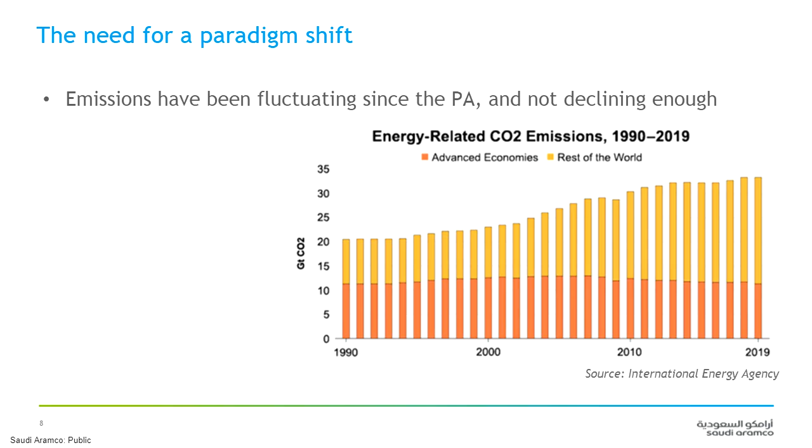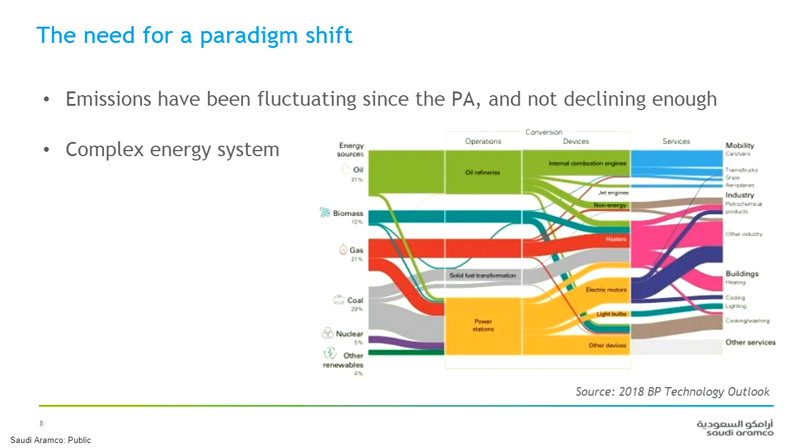Solving this dual challenge will require a paradigm shift in the way we address both energy and climate issues. And there are several elements that support this need for a new paradigm. I will just name a few. First, emissions have been fluctuating since 2015, despite an international agreement set to limit the increase in the global average temperature to well below 2 degrees Celsius above pre-industrial levels, the so-called Paris Agreement. Second, the global energy system is complex with interdependencies and energy products traded across the globe. There is a big difference between the real energy system and the theoretical ones as we design them in our offices and laboratories. In the refining industry, for instance, we have to balance geographical shortage on gasoline and diesel.

Third, the scale of climate challenge is huge. The World Bank estimates at $90 trillion the need for climate-resilient infrastructure investment by 2030. For example, the needed carbon capture and storage capacity alone to deliver on the Paris Agreement ambitions is at the scale of today's oil and gas industry in terms of volume. That is very massive. Very significant investment in renewable energy and energy efficiency in the range of several trillions of US dollars are also needed.

Many key economic sectors are constrained and hard to decarbonize. This includes power, industry, and transport. Indeed, dispatchable power requires storage, which is not available today and will be challenging to implement at grid scale. In the industry, cement, steel, and chemicals are all constrained, while their products will be essential to support economic growth. In a few vital cases, the CO2 is not linked to the combustion of a fossil fuel, but from the process itself. A good example is cement industry, where more than 50% of the CO2 emissions are from the decomposition of calcium carbonate to calcium oxide. Heavy-duty transport, aviation, shipping are all struggling because of lack of technological solutions, although offsetting options are being considered in these sectors. However, there is a hope with hydrogen in industry and transport, but economics and policy have to be improved for mass adoption.

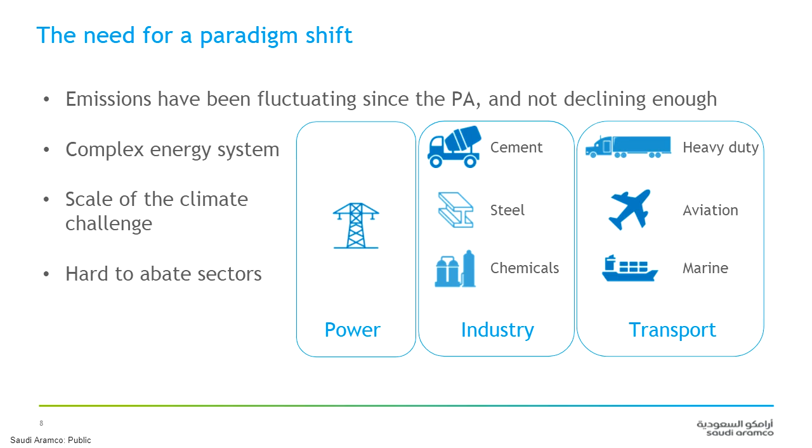Hydrocarbons continue and will continue to play a significant role in the global energy mix for decades to come. Substitution of fossil fuel will require time, money, and technologies that are often not available or economical today, limiting deployment opportunities. Examples include energy storage, CCS, and hydrogen. Most of current climate policies focus on reducing fossil fuel demand only, undermining the potential of carbon recycling and removals. These are the gaps that the circular carbon economy approach is trying to address.

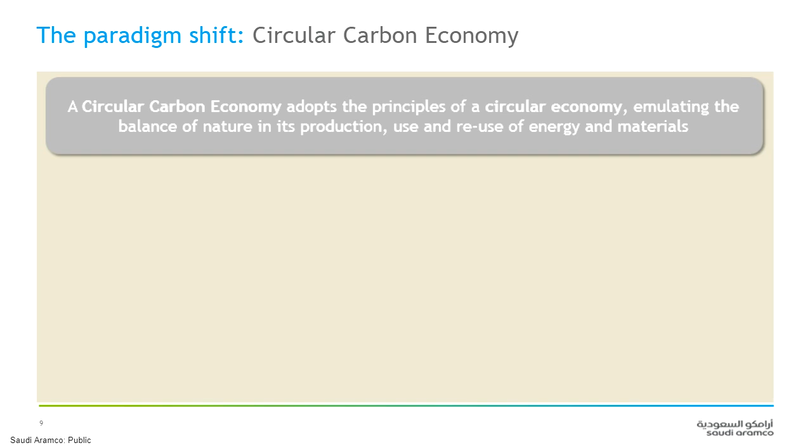At Saudi Aramco, we believe the circular carbon economy can be the solution for the dual challenge of providing clean and affordable energy to the growing world population while addressing GHG emissions. A circular carbon economy adopts the principle of a circular economy, emulating the balance of nature in its production, use, and reuse of energy and materials. I will explain now how a circular carbon economy is different to the well-known circular economy.

As we all know, a circular economy is a system designed to minimize resource consumption and waste disposal, mostly implemented in the waste management industry in the 70s. The focus is on resources and material flows, and the system is based on three principles: reduce, reuse, and recycle, the three R's. A circular carbon economy is an all-inclusive approach that values all options and encourages all efforts to mitigate carbon accumulation in the atmosphere. It focuses on energy and carbon flows.

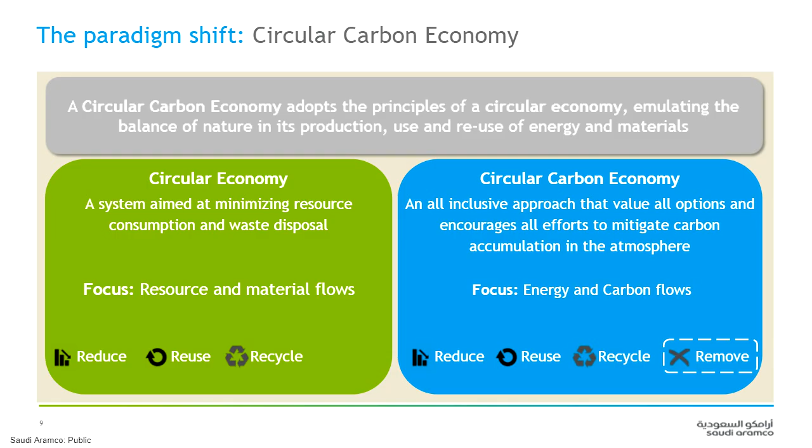A circular carbon economy adds a fourth R, remove, to the 3 R's of the circular economy, making it 4 R's: reduce, reuse, recycle, and remove. Given the global economy's reliance on hydrocarbons with decades of investment in energy infrastructure, we believe the circular carbon economy offers a holistic and pragmatic approach for managing greenhouse gas emissions in a closed loop involving the 4 R's. In the next slide, I will define each of the R's and provide examples of technology solutions under each of the R's.

Reduce under a circular carbon economy framework involves all options that reduce the amount of CO2 entering the atmosphere. Examples of mitigation options under reduce include energy efficiency, non-biomass renewables, nuclear power, CO2 capture from stationary sources such as industrial facilities or mobile sources such as ships, heavy-duty trucks, and fuel switching from coal to gas in the power sector, for instance, and hydrogen.

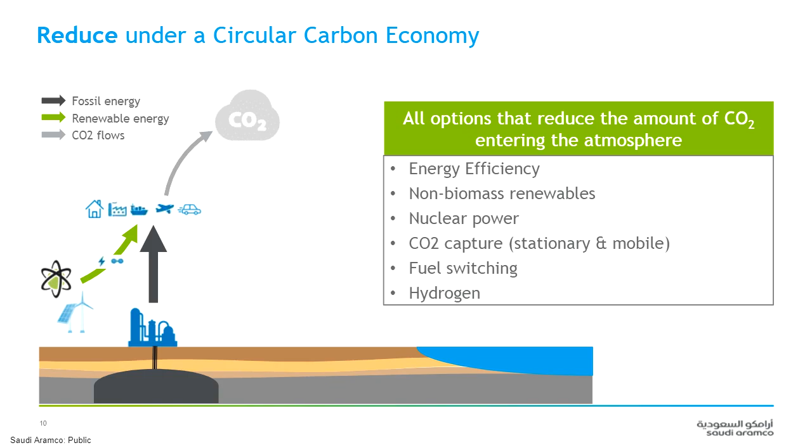Reuse under the circular carbon economy framework involves using CO2 without changing its molecular form. CO2 is not chemically reacted. Examples include most of today's use of CO2, such as dry ice, blanketing, fire extinguishers, etc. So this represents around a few hundred million tons of CO2 per year. Supercritical CO2 applications, such as in the power sector, where CO2 can be used as working fluid instead of steam, as in conventional steam cycles. The US-based company Net Power is piloting this technology in Texas.

CO2 enhanced oil recovery, where CO2 is injected in maturing oil fields to improve the extraction of the remaining oil. In this process, part of the injected CO2 remains permanently trapped underground.

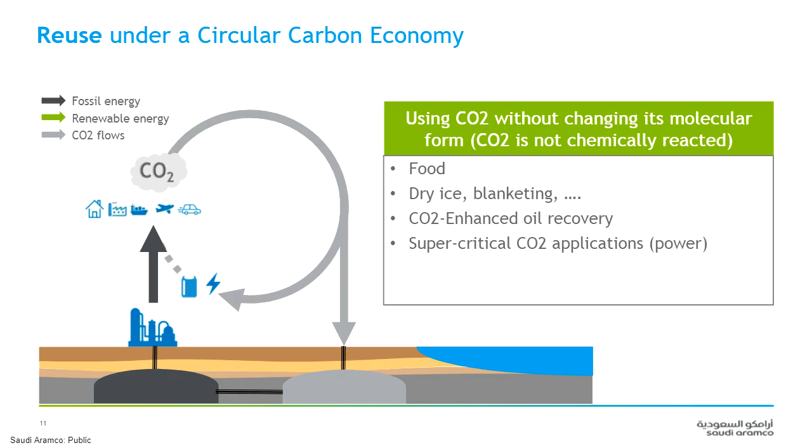Recycle under the circular carbon economy involves turning CO2 into new products. The CO2 is chemically reacted in this step. Examples under recycle include synthetic fuels, fertilizer and urea, methanol and chemicals production, polymers and concrete. In most of these cases, cheap renewable energy is needed for the chemical reaction to provide a real climate benefit based on a comprehensive life cycle assessment.

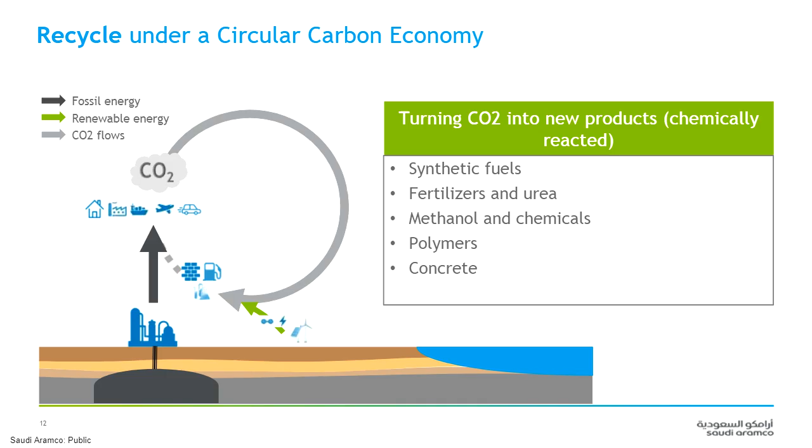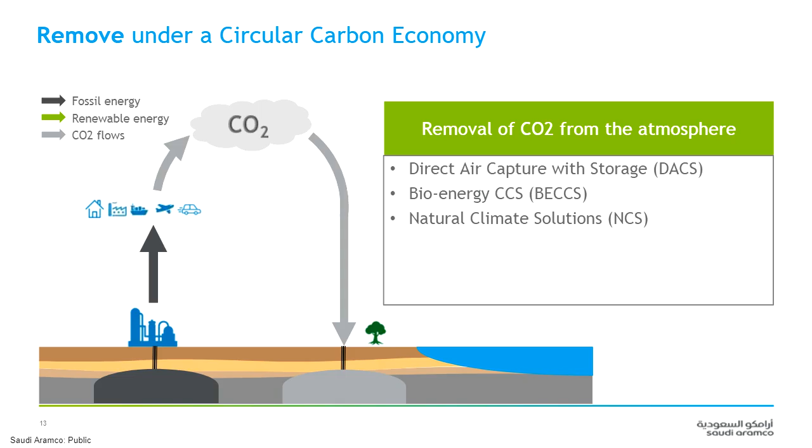Remove under a circular carbon economy involves taking CO2 out of the atmosphere. Examples include direct air carbon capture with storage, DACS, bioenergy with CCS, BECCS, and natural climate solutions, NCS, such as reforestation, soil, and oceans. All combined together, this is how a circular carbon economy framework may look with the 4 R's: reducing, reusing, recycling, and removing greenhouse gas emissions in a closed loop.

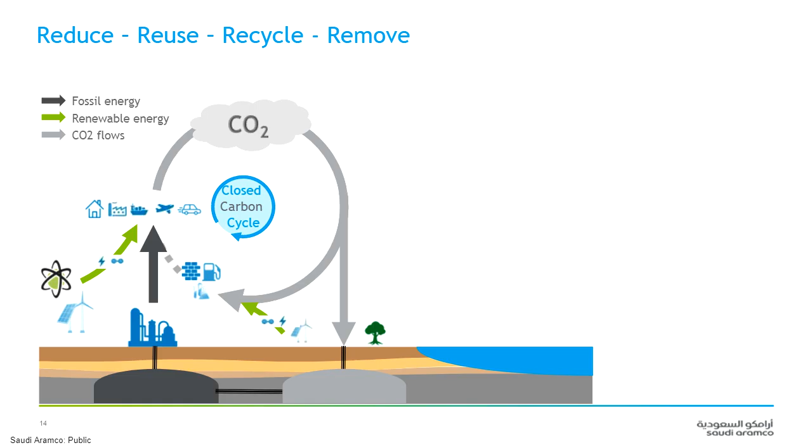We believe this framework offers a holistic and pragmatic approach that integrates all energy sources and values all emissions mitigation efforts, allows the optimal use of existing energy infrastructure and values decade-long investment in the energy system, addresses emissions in hard-to-abate sectors by building a carbon reuse and recycling economy, and enables negative emission technologies that are crucial for meeting the net zero emission target.

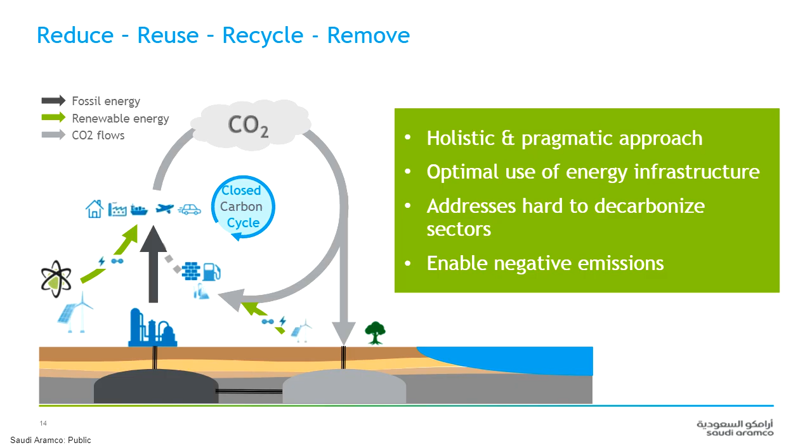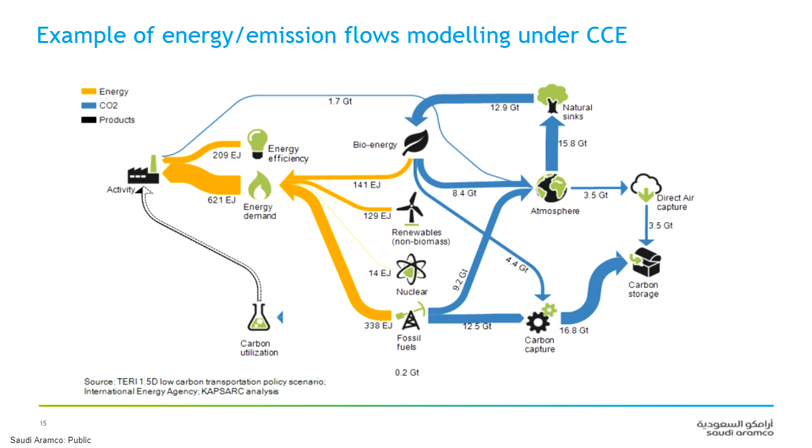The circular carbon economy is a G20 priority for this year in both climate and energy working groups, with an objective to build consensus around needed policies, technology innovation, and collaborations. I have the privilege to be part of those meetings, and there is certainly a growing interest from G20 members on the circular carbon economy approach.

Japan already established a circular carbon recycling initiative under their Ministry of Economy, Trade and Industry (METI). They focus on the production of CO2-free hydrogen and zero carbon electricity supply as enablers for chemicals, fuels, and mineral production. The U.S. Department of Energy held a summit in 2018 on realizing the circular carbon economy. Discussion focused on how to integrate nature-based solutions, renewables, and carbon capture in a view to balance emissions between source and sinks.

In 2018, the Oil and Gas Climate Initiative introduced the Net Zero Pathway under the title Towards Circular Carbon, focused on improving energy efficiency, providing clean and affordable energy, capturing, storing, and using CO2, and balancing remaining emissions through the NCS. Many other countries and institutions are adopting the circular carbon economy concept or some element of it, as this is seen as a pragmatic way to achieve carbon neutrality.

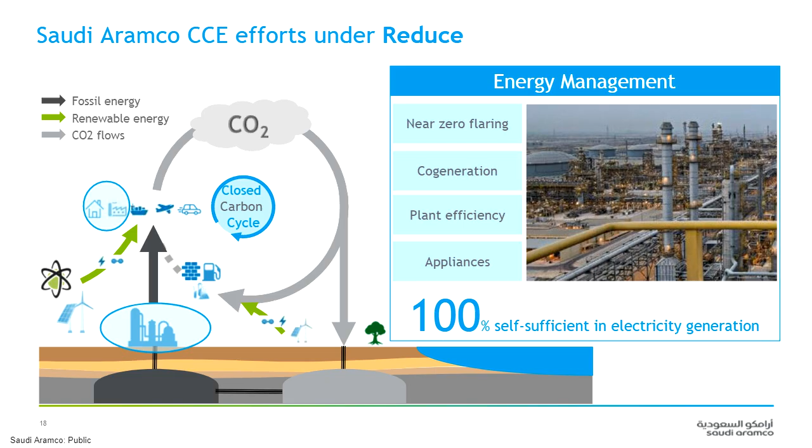To put this in perspective, in a scenario where the global upstream crude oil carbon intensity matches that of Saudi Aramco, the resulting greenhouse gas emission savings is estimated at about 1 gigaton of CO2 equivalent per year. So this is equivalent to the development of 650 CCS facilities of about 1.5 million tons of CO2 storage capacity worldwide.

Another recent paper published in Nature Climate Change on carbon intensity of global crude oil refining and mitigation potential shows that shifting to low carbon intensity crude can help the oil industry save between 56 and 79 gigatons of CO2 by 2100.

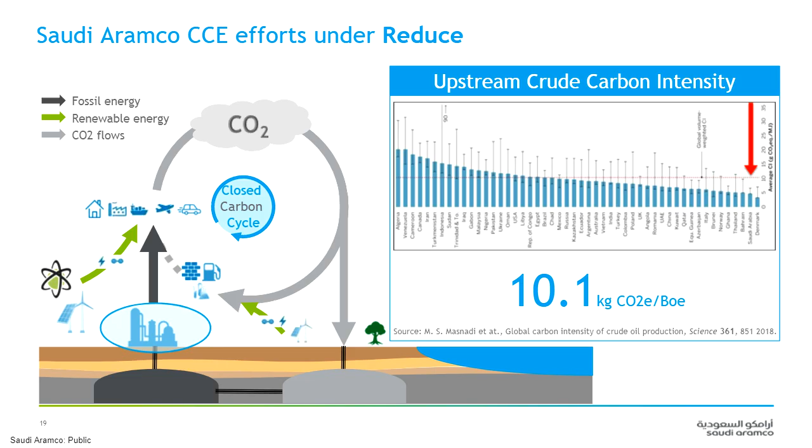Having troubles. Jim, I'm having troubles moving to the next slide. Johnny, we're on reduce sustainable transport technologies. Oh, okay. So from my screen, I don't see it. So maybe you can take the control. Okay, hang on. Let me see. Okay. So anyway, which slide do you have, Jim, in front of you? Slide reduce sustainable transport technologies. If you want me to move the slides, just say so.

Okay, all right. So under reduce in the light duty transport sector, while we recognize that electrification is progressing, we believe the biggest scope for reducing light duty transport emissions remains improving the efficiency of internal combustion engines. At Saudi Aramco, we are developing novel technologies such as gasoline compression ignition engines, or GCI in short. These engines burn gasoline in the traditional diesel compression ignition platform, resulting in significant efficiency improvement and reduced CO2 emissions.

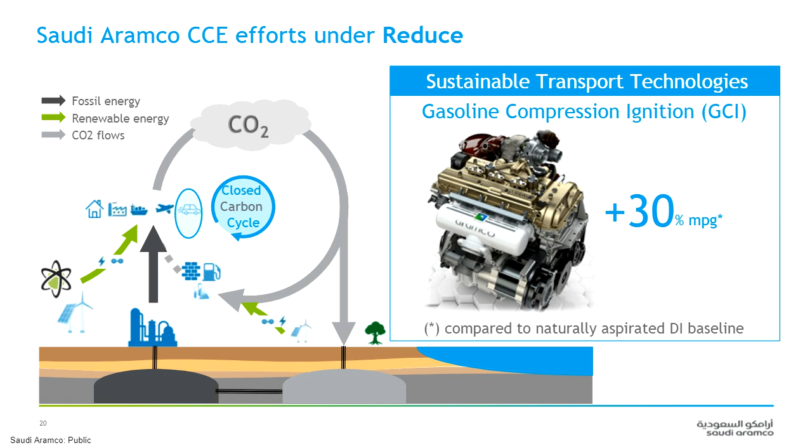Jim, next slide, please. Yes, it is showing there may be a delay on the system, as we've told people. So this is reduce and talking about sustainable transport technologies. You want to move to the next one?

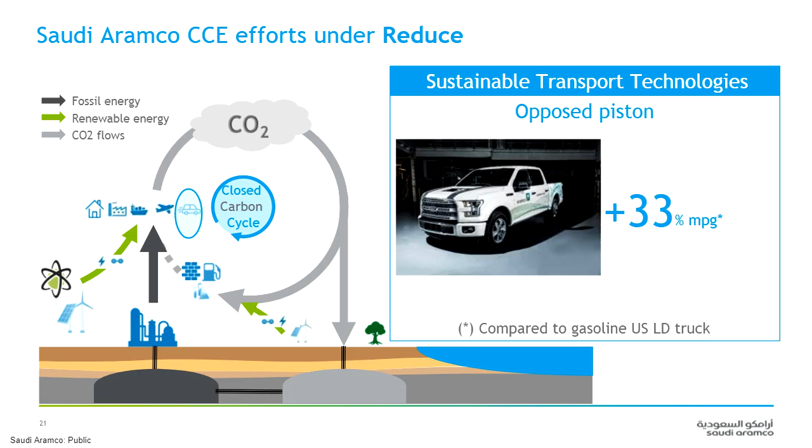All right, okay. Another example of efficiency improvement to reduce in the transport is the opposed piston technology with a demonstrated 33% increase in fuel mileage compared to gasoline US light duty trucks. Next slide, please. Now we are on the sustainable transport heavy duty mobile carbon capture, Jim. Correct.

So as we discussed earlier, the heavy duty transport sector is constrained and abatement solutions are limited. Electrification would not make sense here in the short term, but carbon capture could be a viable solution in these long haul trucks. We are developing onboard carbon capture systems for heavy-duty trucks using the available waste heat to separate CO2 from other gases, compress it, and store it on board.

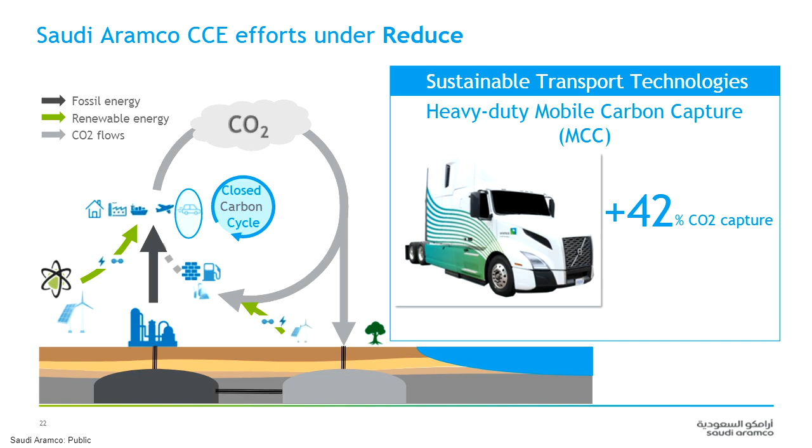So the CO2 can be discharged at the gas station during refueling, gathered from several trucks and transported to a storage location or utilized on-site to produce low-carbon products or fuels using cheap renewable energy. Our first demonstration prototype achieved 42% CO2 capture from a heavy-duty truck, and we are also working on developing a second generation targeting 50% CO2 capture. Next slide, please.

On the hydrogen space, we believe hydrogen can play an important role in reducing emissions in many industries, including transport through fuel cells. Hydrogen can be produced through excess renewable electricity using electrolyzer or through methane steam reforming associated with carbon capture, the so-called blue hydrogen. We recently inaugurated the first hydrogen fueling station in Saudi Arabia in partnership with Air Products. The pilot station will fuel an initial fleet of 6 Toyota Mirai fuel cell vehicles to be tested in real Saudi environment conditions with high purity compressed hydrogen. Next slide, please.

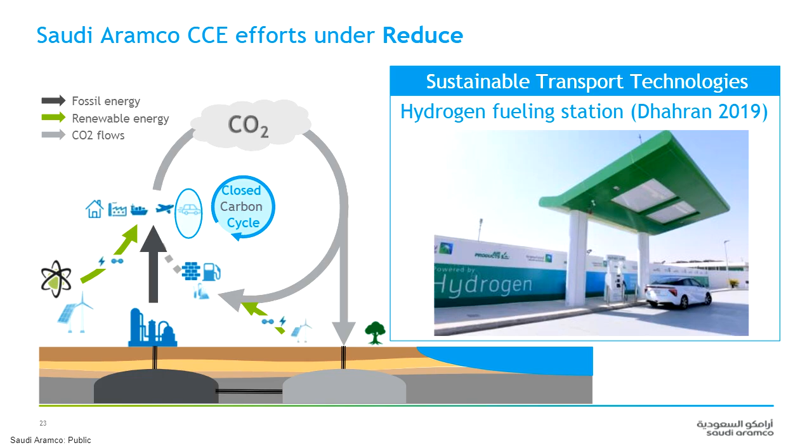On CO2 sequestration, under reuse where CO2 is utilized without changing its molecular form, we have been piloting carbon capture and reuse for enhanced oil recovery since 2015 when we began injection. I have to stress that CO2 EOR is not needed for production at scale for decades to come, given the vast oil resource we have at Saudi Aramco and our low production cost. But using our in-depth expertise in reservoir management, we decided to build this pilot and contribute to the improvement of knowledge in the field of CO2 sequestration.

The project captured 800,000 tons of CO2 from an NGL plant, transported through an 85-kilometer pipeline where it is injected in Uthmaniyah field. This is one of the most sophisticated CO2 EOR projects in the world, as it has more than 1,000 sensors to monitor the CO2 plume and provide extensive data on CO2 storage. The amount of CO2 stored is above industry standards through the use of a comprehensive monitoring and surveillance program. Next slide, please.

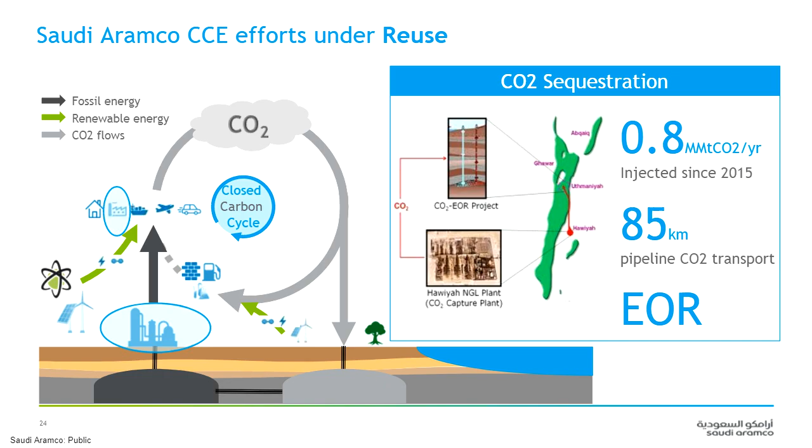Under recycle, where CO2 is utilized as feedstock and chemically reacted, in 2016 we acquired the polyol business from a US-based startup company. This technology, named Aramco Performance Materials, converts CO2 into cleaner, high-value end products with significant performance, cost, and carbon footprint improvement using a proprietary catalyst. The polyol product contains up to 40% CO2 and can be used in many industries to produce foams, coatings, elastomers that we use in our daily life.

Another exciting project is our announcement yesterday for CO2 to fuel in collaboration with Repsol. This project will combine green hydrogen produced from renewables with the CO2 captured from Repsol Bilbao refinery to produce more than 3.6 million liters of fuels per year for vehicles and aircraft. Next slide, please. Now I'm under recycle.

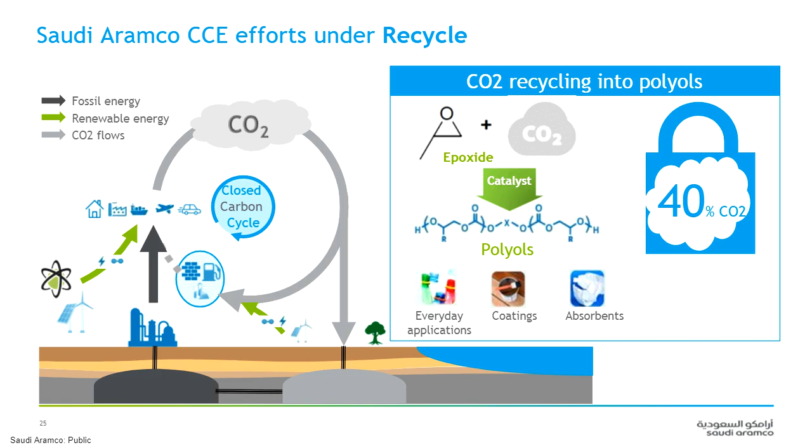Something that I'm very excited about under recycle is the use of CO2 in cement and concrete. This technology is extremely important given the fast-growing need for infrastructure and building. Today, water consumption for concrete curing represents more than 3 trillion liters per year. We are developing solutions that utilize CO2 for concrete curing instead of water.

Saudi Aramco has its own CO2 to concrete technology, but through the Oil and Gas Climate Initiative, we invested in Solidia technology that produces concrete containing up to 70% CO2 and reduces 80% of the water consumption for curing. According to Solidia, their technology has a potential to eliminate a minimum of 1.5 gigaton of CO2 each year. Next slide, please.

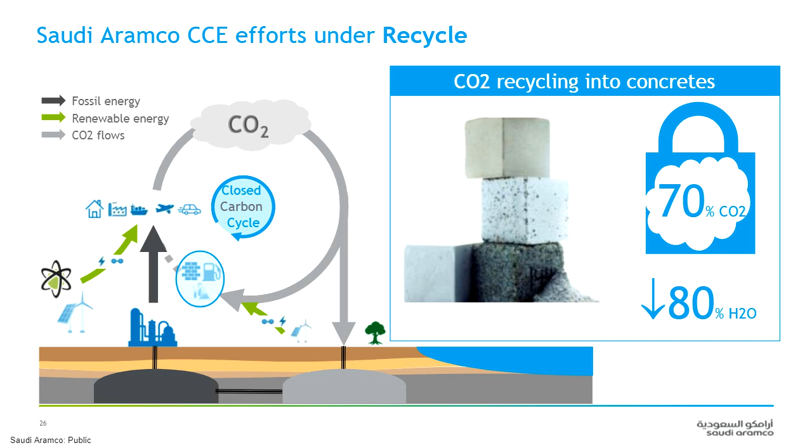So under remove, we are developing breakthrough materials for direct air carbon capture. These functionalized metal organic framework materials have very high adsorption capacity that can be combined with cheap energy to improve the economics of direct air carbon capture, which is essential for offsetting some of the hard-to-abate sectors such as aviation. Next slide, please.

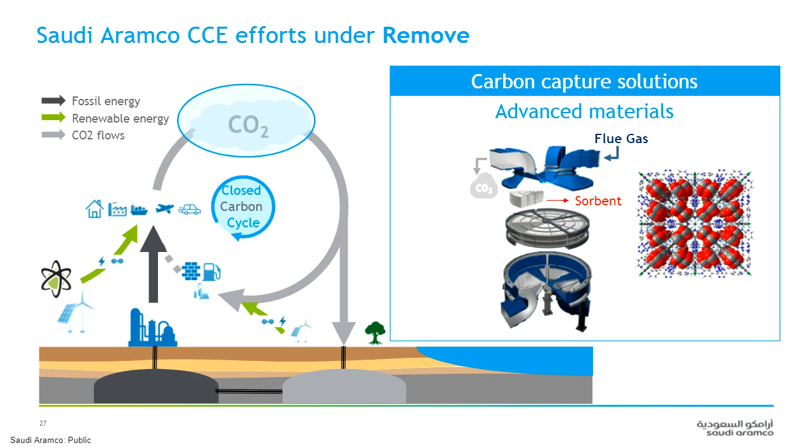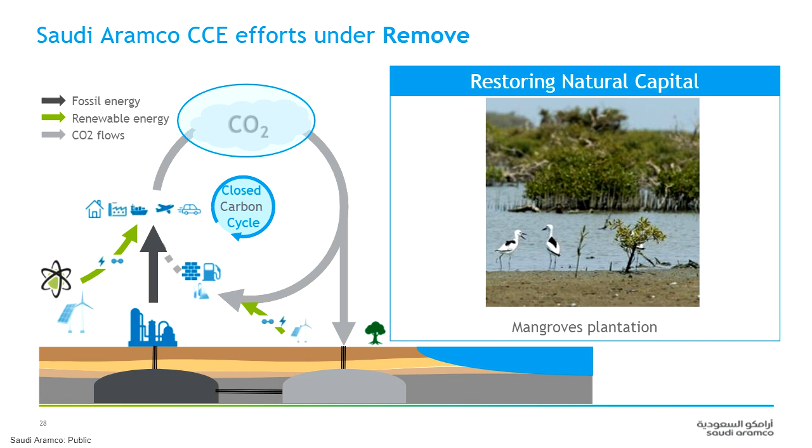Thank you, Tijani. A truly wide-ranging and very thought-provoking presentation that raises all sorts of interesting questions for our Q&A session.